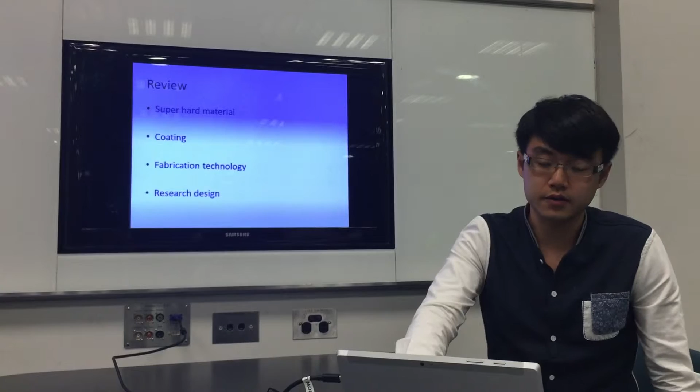First, let me introduce what is the super hard material. Everyone knows diamond is the hardest material in nature, and it is very expensive industrially. Because it's so expensive, people don't always use it to make large things.

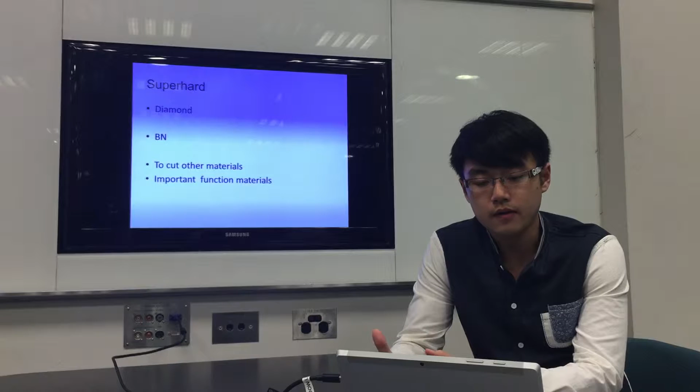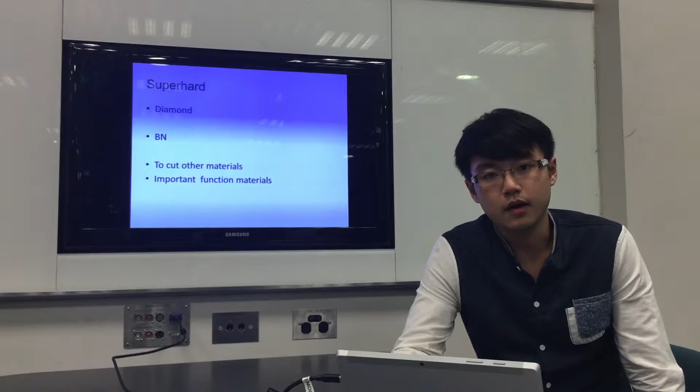So people think about making man-made materials to do these things, like boron nitride, BN. People also use super hard material for cutting other materials, or it's also important as a functional material.

But the super hard material always needs large material, and the performance is not good enough. So people thought if we can use coating to replace the material, that maybe it will be better. So in 1994, Dr. Veprek...

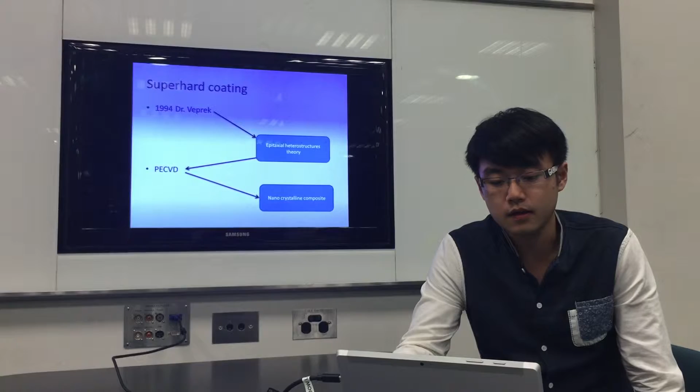...according to the heterostructure theory, used this theory to think maybe we can make another new coating. They used the method of PECVD to make the material about nanocrystalline composite.

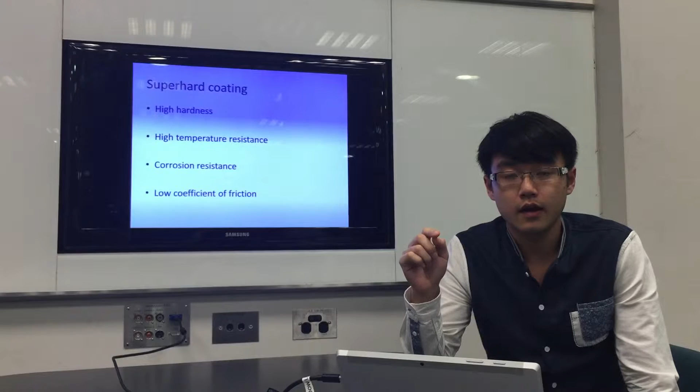In super hard coating, they always have very useful performance, like high hardness and high temperature resistance, and also very good corrosion resistance and low coefficient of friction.

In super hard coating, we always divide it into two parts. First is heterostructure, and the other is nanocrystalline composite.

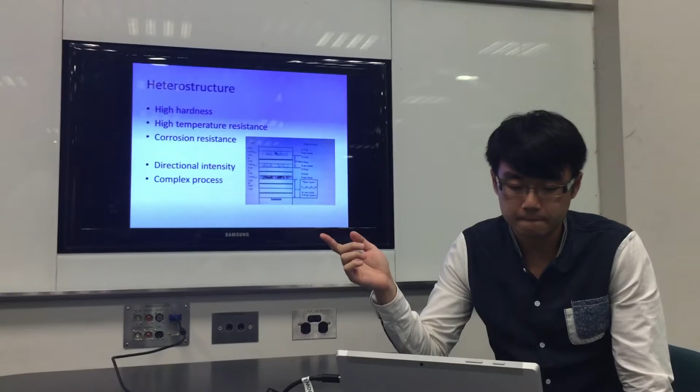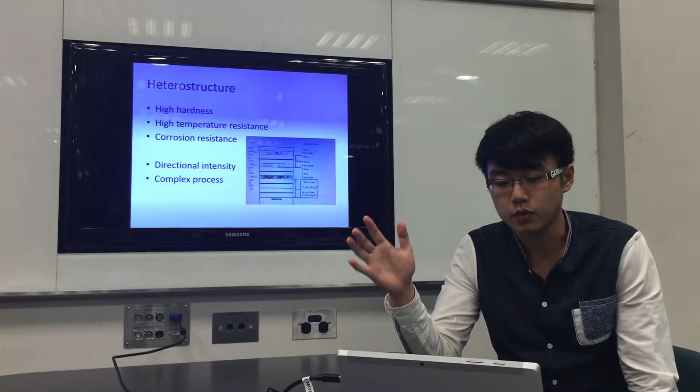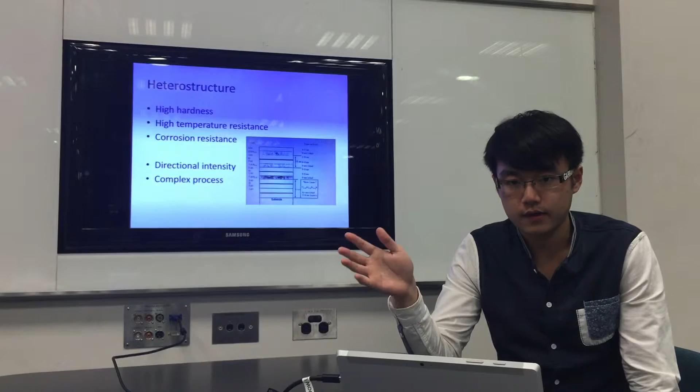In the other part, the nanocrystalline composite, this is a very general material coating. The nanoparticle will be in other materials, which have an amorphous structure, and we put the nanoparticle into this material, and they combine together to form a very stress-resistant structure.

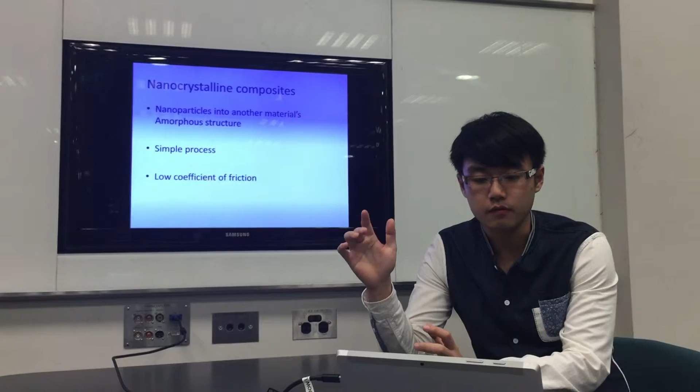We can see it's a very simple process, and you have a very low coefficient of friction.

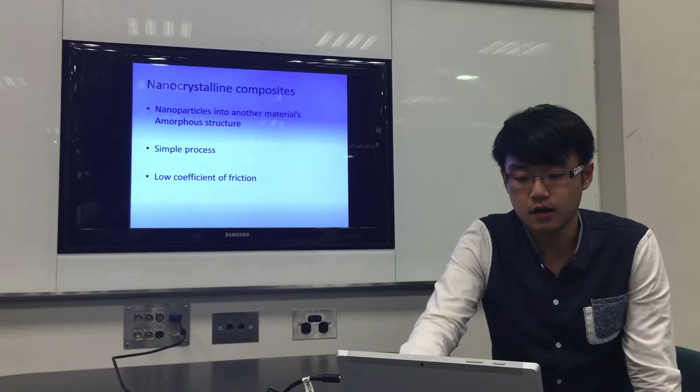Next, let me introduce the fabrication technology. We can divide it into two parts: chemical vapor deposition and physical vapor deposition.

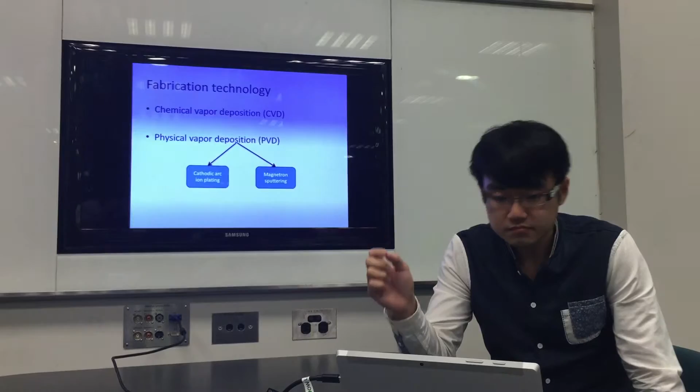Chemical vapor deposition is a very simple method, the first one used, but it has many disadvantages, like it must work in a high temperature environment, the coating is always in a state solution, and the hardness is not good enough.

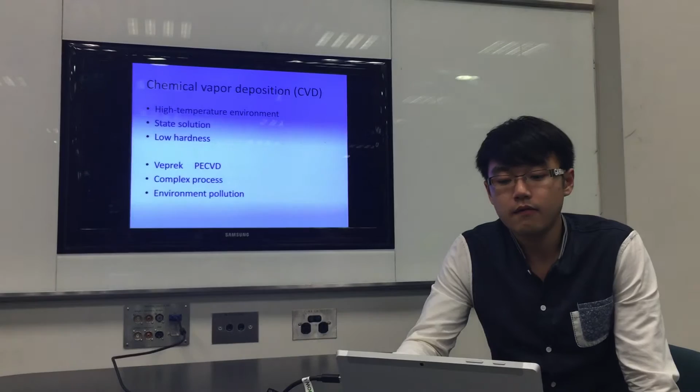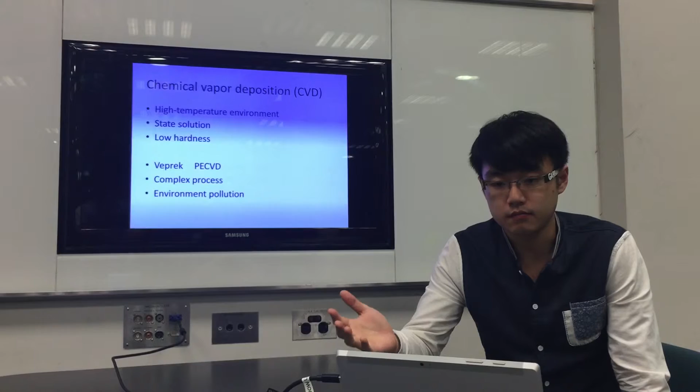So Dr. Veprek changed the method to PECVD, but it's also a very complex process. In this method, people always use metal halide, so the environment will be polluted. From now on, people don't usually use this method.

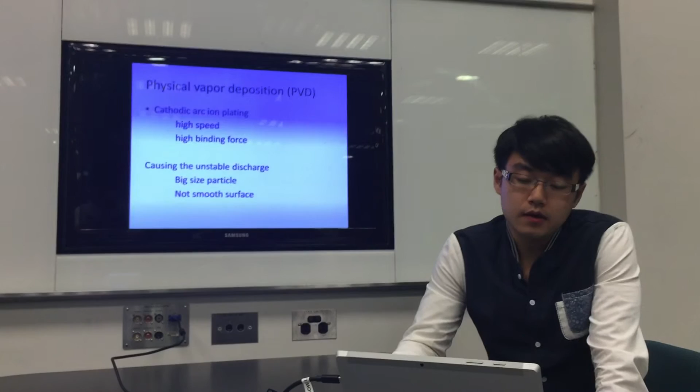Next method is physical vapor deposition. This method is commonly used. The first method is the cathodic arc ion plating.

This method uses electrical current to put the coating onto the metal, giving high speed and high binding force. But because the voltage is unstable, causing unstable discharge, the particles will be big size and the surface not smooth.

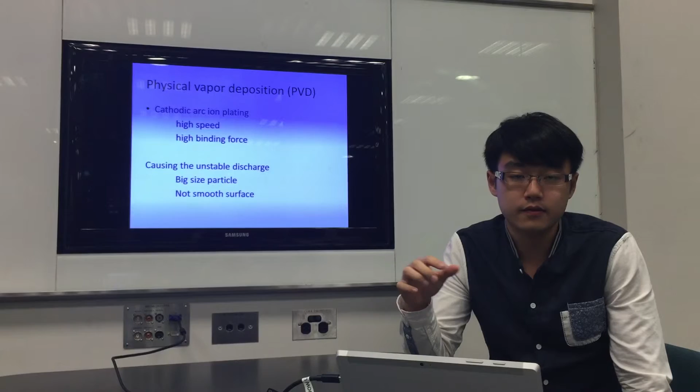In physical vapor deposition, there is another method, we call it magnetron sputtering. In this method, the surface is smooth, and it also has high uniformity.

But in this method, the speed is very slow, because if we make the speed up, the coating will not cover enough.

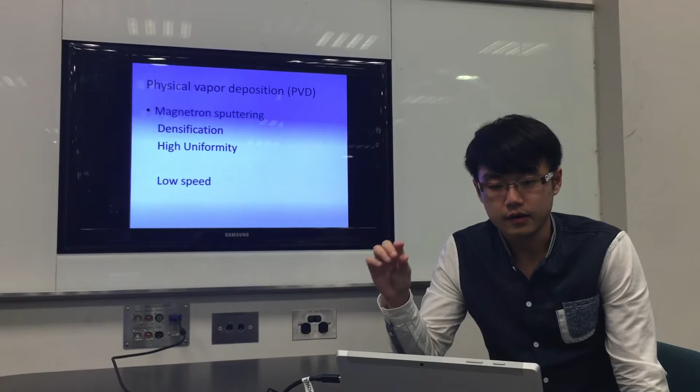Next, I will introduce my research method. I found the titanium silicon nitrogen coating has a high coefficient of friction.

So we add carbon into this system, making it titanium silicon carbon nitrogen. When we put carbon into this system, it can decrease the friction. But up to now, we found no one has introduced heat resistance study about this system.

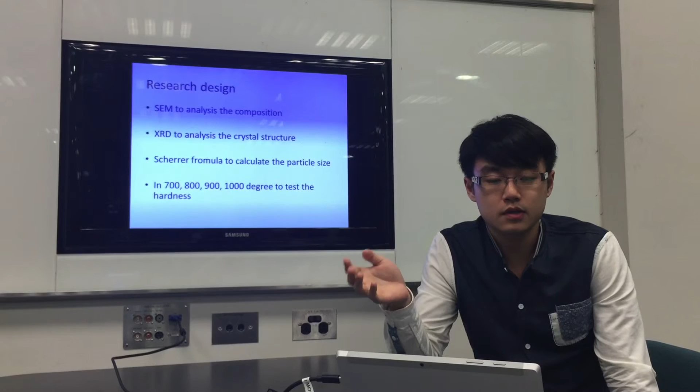So I made a design about this system. First, I will use SEM to analyze the composition, and also I will use XRD, X-ray diffraction, to analyze the crystal structure.

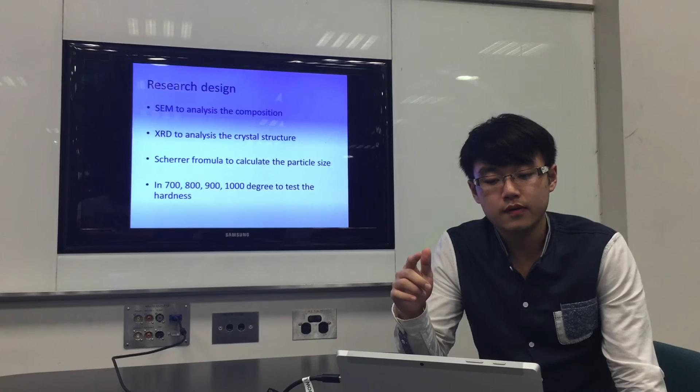Then I will use the Scherrer formula to calculate the particle size, and also at 700, 800, 900, and 1000 degrees, we will test the sample hardness. From this test, we can analyze the heat resistance.

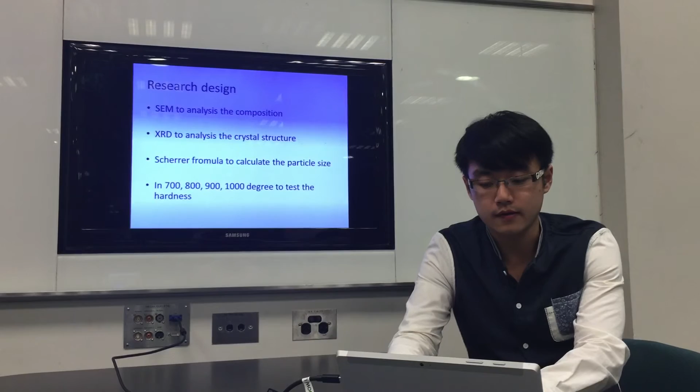Let me conclude my presentation. First, this method is always being developed, and in this area, people have not focused much on the high temperature application. So in further research, I think if we can focus on this part, it will be good.

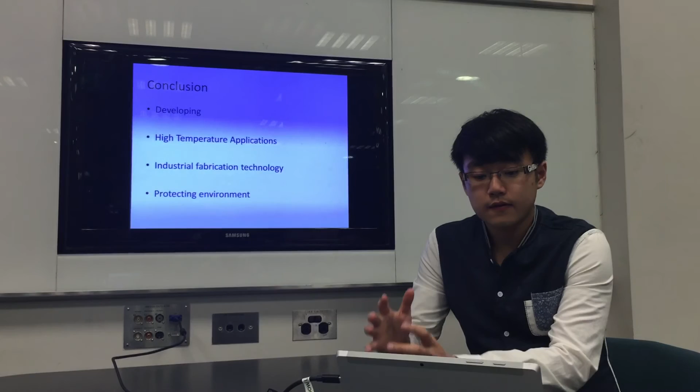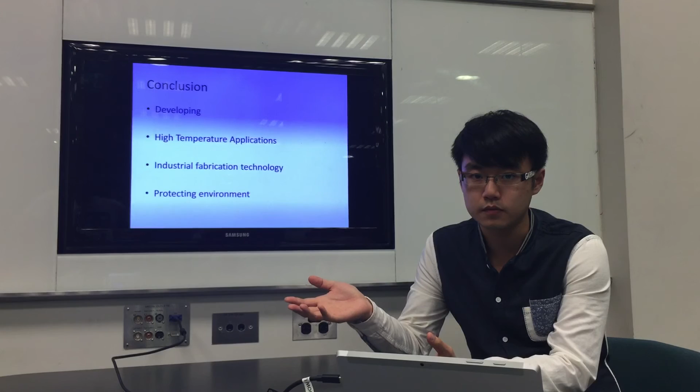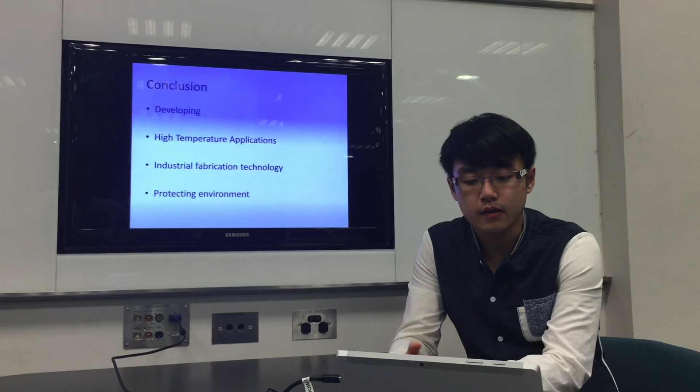Also, in industrial fabrication technology, I think if we can bring the sample into industrial use, it will help make the material good enough for popular use. All these methods also produce some terrible gas, causing pollution in the environment, so protecting the environment will be a further research direction.